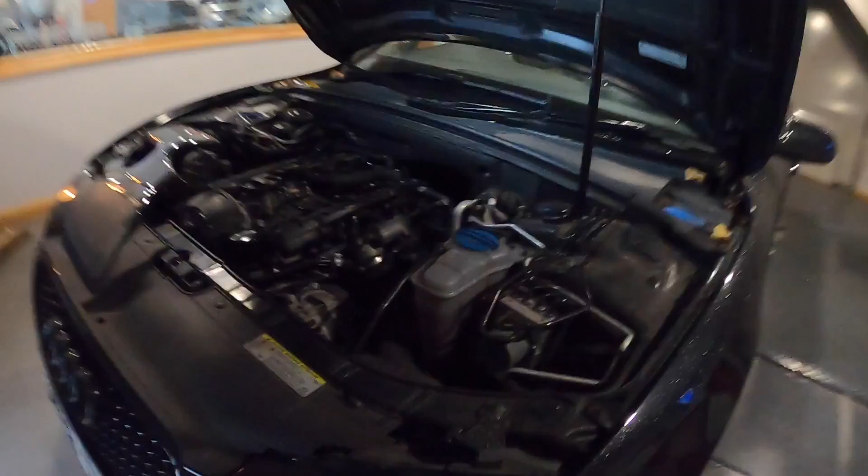Hello and welcome to the Audi A4 2-litre TFSI K04 converted. It's got the K04 down there. It's a bit dark in here today. I've been moved into the dyno room from the workshop. So let's get a bit of light on this.

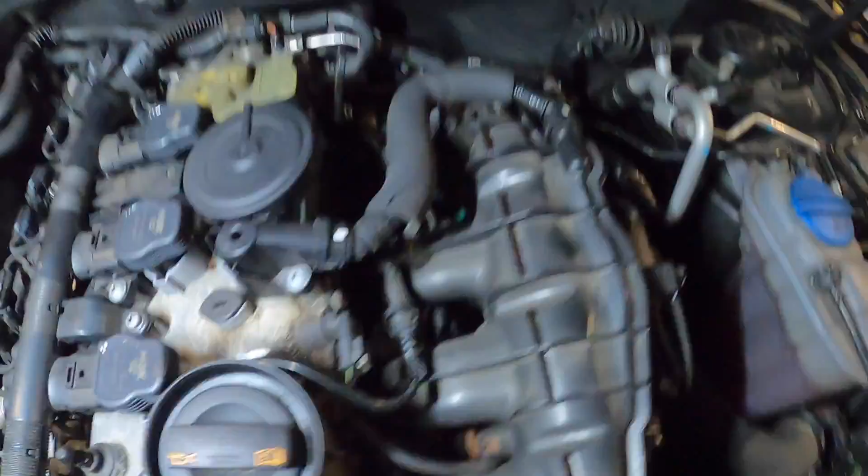So we've got a K04 turbo. Unfortunately, he hasn't got the injectors, but we'll still set it up for him today to get as close as I can. It's obviously maxing out these injectors. So let's begin. So first of all, smoke test.

Took the intake pipe off, so then look at that first. Get the smoke machine out. A bit harder in here, I've got to go on the old compressor. And then we'll see what this is saying. So that's the smoke machine all attached on the power. Minus is there. I was just waiting to see what this says.

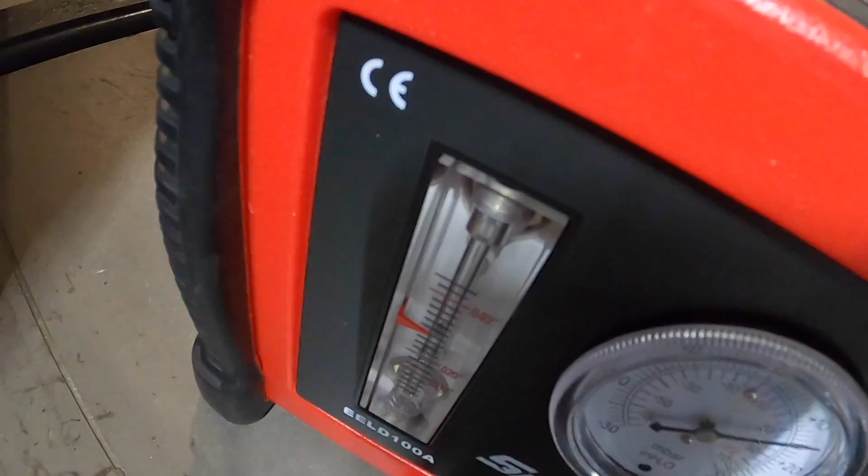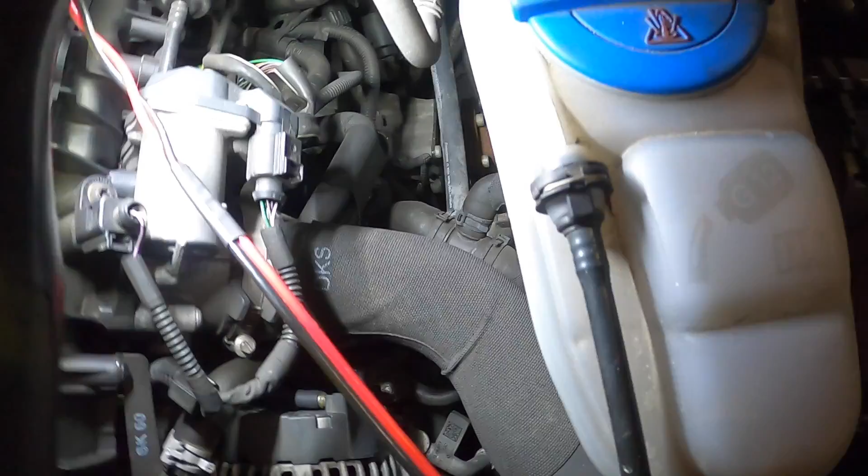Usual places, normally the PCV pipes. You get the rocker bolt sometimes. This one's got a metal rocker, so it's different. So far so good. It's balancing on there. Just looking at the little ball bouncing away. That normally means there's no leaks. There's no bad leaks anyway. That's pretty good. It's obviously decat. His sensor's actually here. It's the oxygen sensor. Happy days.

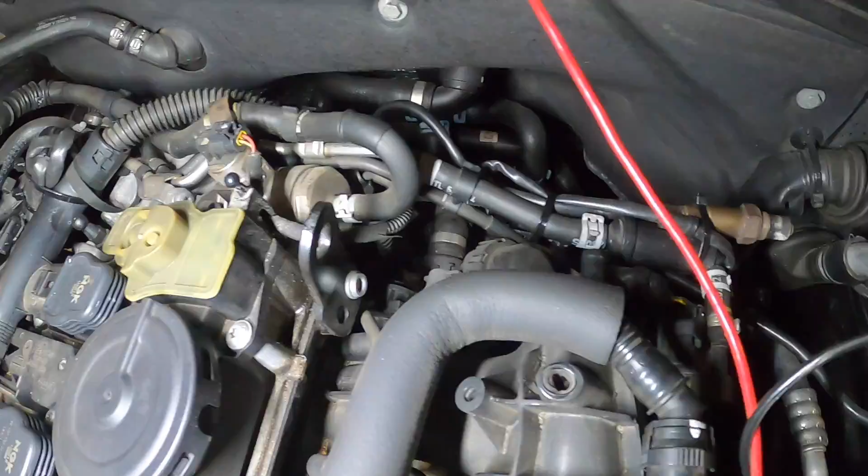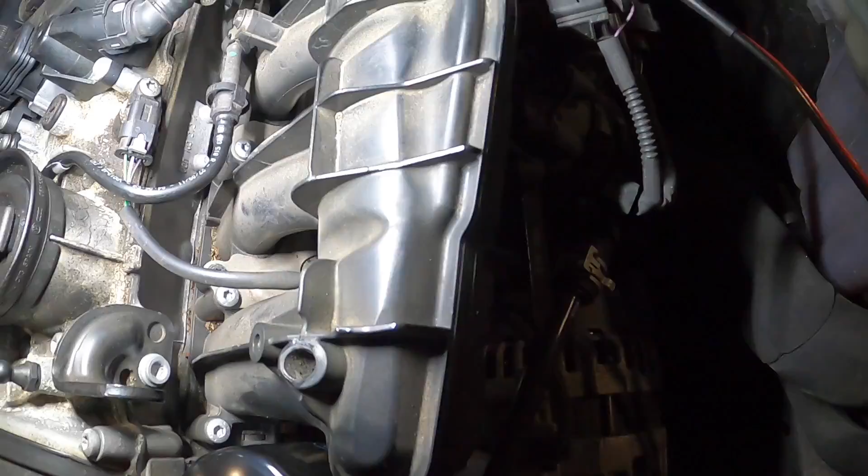Basic setup, K04 turbo. It's got an APR intake. I'm gonna whip one of the plugs out, see what plugs he's got in it. Standard rail sensor, standard injectors, uprated high pressure fuel pump. It's got a decat downpipe, exhaust back. Pretty basic stuff. I'm just going to set it up today. I'm not looking for the figures because he hasn't got the injectors. But we can still get it all set up for him so he can drive it.

Gonna check to see if the N75 is plugged in. A bit awkward on these to come around the front. Yeah, that's all plugged in. It's just down there. Awesome. So I'm just going to whip one of the plugs out, see what the crack is with that, see what the gap's like, see if I have to remove the other three. And then we'll begin tuning, see what's going on with it. So let's do that.

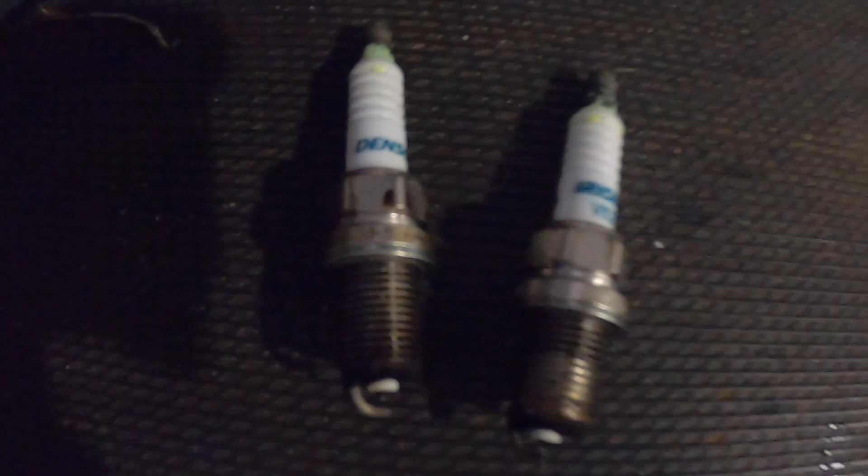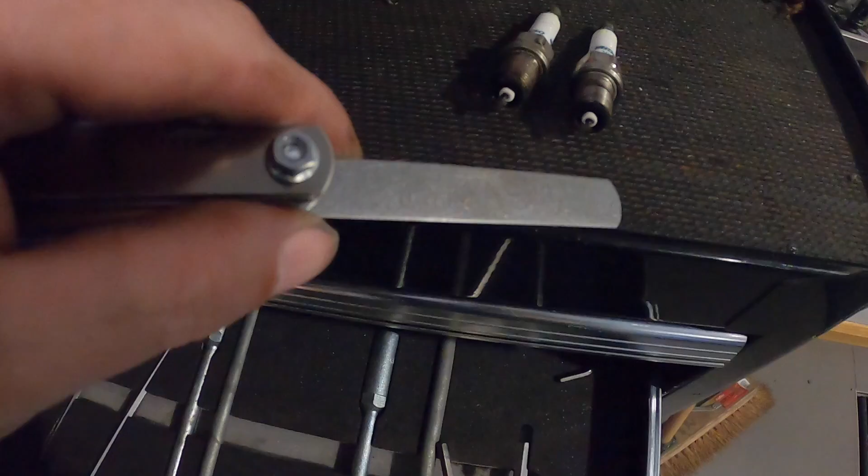Right, running a Denso plug. Looks like a VK22. Can't quite see the heat range on these, so I'm going to have to Google it a little bit. These rocker gaskets started to go around the top, it's getting a bit oily. I've gapped them to 0.7, so basically it's 0.7 mil. This is 0.028 in Imperial. So they are gapped, all four are now gapped and ready to go in. So just put them in and then carry on.

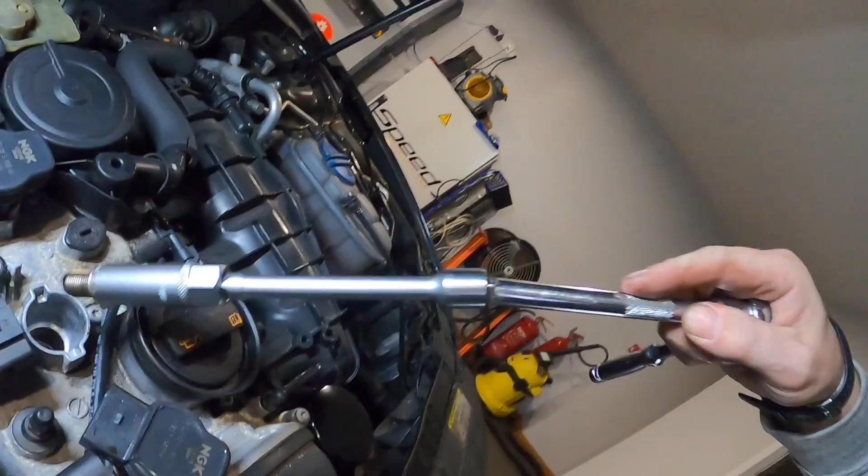A bit of a tech tip. With these spark plugs, once you've gapped them, never just drop them into the hole. Actually place them in with your spark plug socket, because once you've gapped it, if you drop that into the hole, you can end up tapping the electrode and then changing the gap on the plugs, so it's not ideal. Alright, here we go.

So we're in the car, checks all done. Just gonna get set up in the car. First of all, extension lead, because OBDs are a pain to find sometimes, so I always run the extension. It's got a fancy wing mirror, but we'll deal with that. So first of all, VAGCOM. This is the first point of call. Make sure the car's okay. I've got an engine management light, so got to look into that, sort that out.

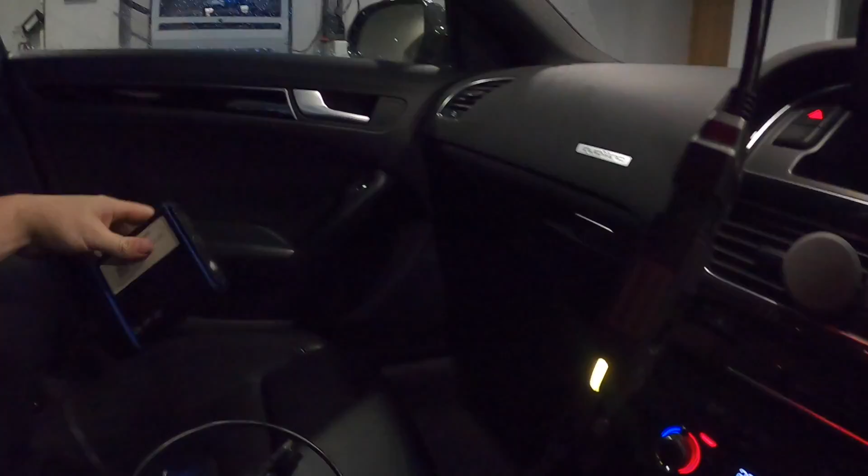Right, mess here. Going to use B flash on this hopefully, if they've got the stock file. So obviously these are virtual reads, so you can only do it if they have the stock file, otherwise I have to go find it and send it to them and then get them to put it on. So get that on there.

So I'm going to open up the laptop and get started on this one. See if we can make some juice. Right, so we're all on and all in and ready to go. So first of all, let's see what VAGCOM's saying. So I've got fault codes, I need to find out what they are.

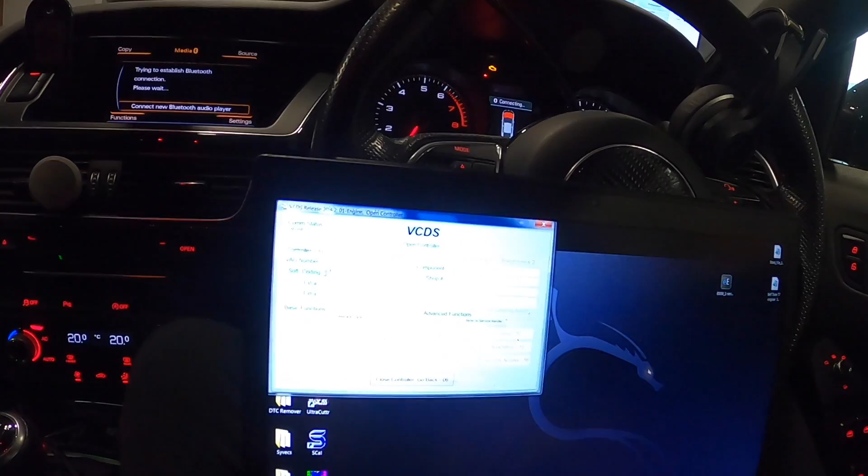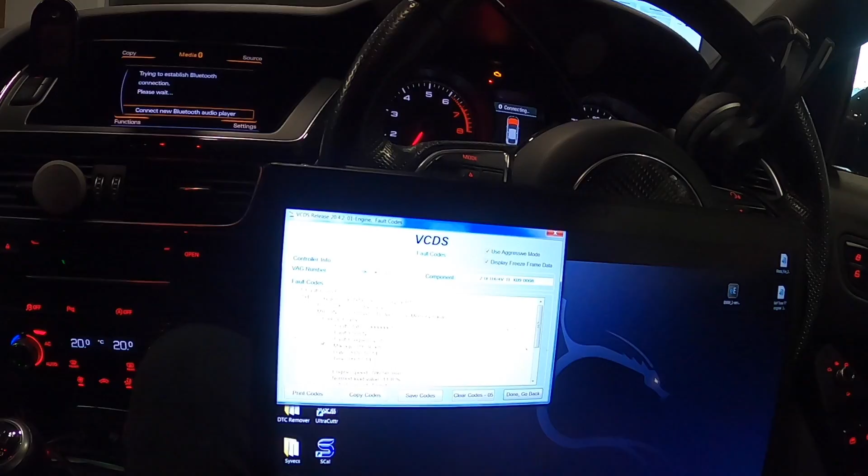There's no point starting tuning until you've fixed all the other stuff. So you've got bank one lambdas, oh, so we've only got decat, so that's fine. So that's an easy one. So it's not even a limp mode, shouldn't be. It's too lean, but he has left it kind of outside of the car, so that will be saying it's too lean, not the ideal way of dealing with it.

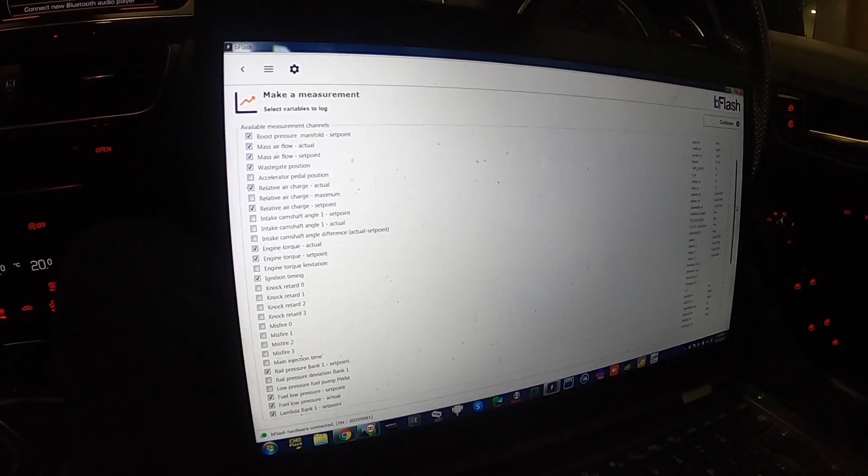Right, this one being a MED17 car, I'm actually going to use bFlash to log this one. So as I said, I don't know which way I'm going to do the videos, but I went through what the tools are and what they're doing, things like that. So bFlash will read and log this vehicle. So I'm going to use it for logging because it's a lot easier to use. You've got a lot more available on that.

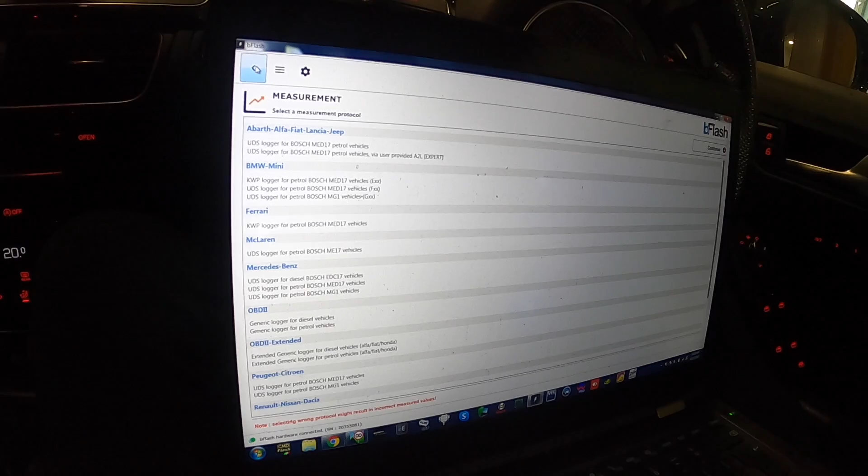So as a base run, well, actually first I'm just going to go in, read the car. Now I know it's a bFlash. I'm going to read the car and then I'm going to cap the boost. There's no sensors to set up on this one because it's literally just a K04 turbo with a few bits on. So I'm not looking for maximum power, but I do need to cap the boost first just to give it a run to see how that goes. So let's get this read off.

Right, well, this is going to be a fun day. So this particular car or ECU type, I haven't done the K04 conversion development for, so kind of thrown in the deep end. I've got a car on the dyno with a K04 on, but it's got no fuel changes, so it shouldn't be too hard just to set the boost up so it's somewhere near, obviously without the injectors.

So that's just flashing on the base tune now. I've literally just changed the fuel in, took the request to how I'd like it. I've left all the load tables stock just so I can see what the boost does as is, and that's pretty much it for the first run. I've also deleted the cat, so I can run it without it dropping into limp mode for whatever reason. I guess it's been over boosting, but I don't know.

So I'm just going to go through that. I'm going to run it up as it is and run bFlash for the logs, go over the logs and start bringing the boost in and see how I get on with that, really. So, fun day. Luckily this is the only car in today, apart from the ones I've already got here. So I've got time to have a mess around and see what the crack is with this. So I'll come back to you when it's flashed, because I don't know how long it's going to take to flash being CMD. So hopefully it's not too long between flashes.

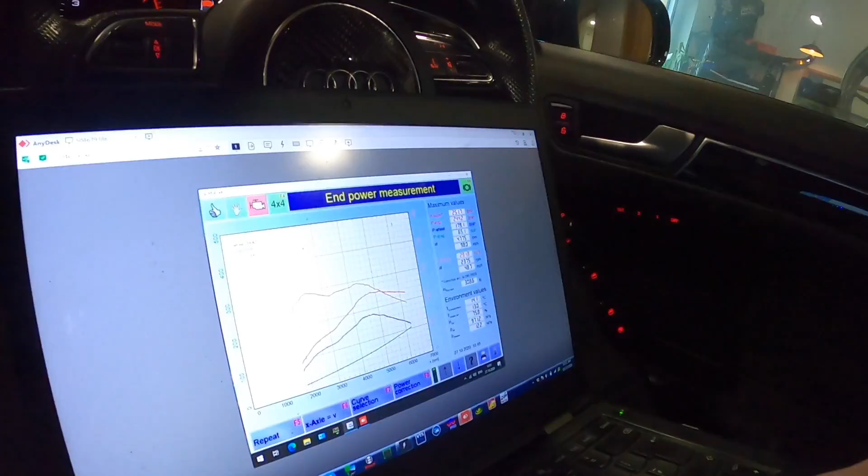Right, so run one, not so bad really. So running 251 brake at 291 foot-pound. Get that in the shot - 251, 291 foot-pound. Graph's not amazing, but I didn't really expect it to be on the first run.

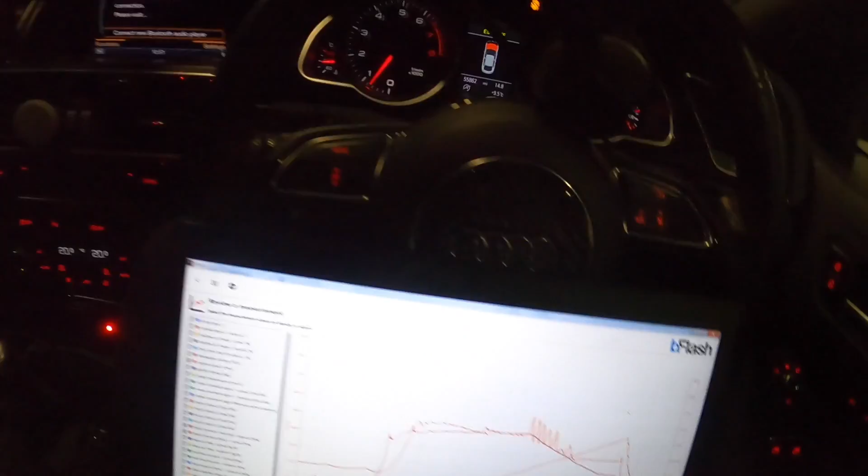So log wise, this is my boost request. I'm obviously going to have to request a fair bit of boost up top because this is a K04 Turbo. It can pull a lot more than the K03, so the top end's going to be very different. So I'm going to change that. Fuel and everything else looks okay.

So apart from that, I'm going to go in and change a few tables and see if I can get this boost to hold much better. I want to set this around about 300 horse, just to get it set up a little bit better. But as I've said, this is a bit of an R&D session because I haven't actually done these ones with a K04 Turbo, but I have tuned the K04 Turbo quite a lot, so I ain't too fussed, to be honest. As long as I can control the boost, I'm good to go.

So I will come back to you in a couple of seconds. I'm going to do some changes and then I'll come back to it and run it again.

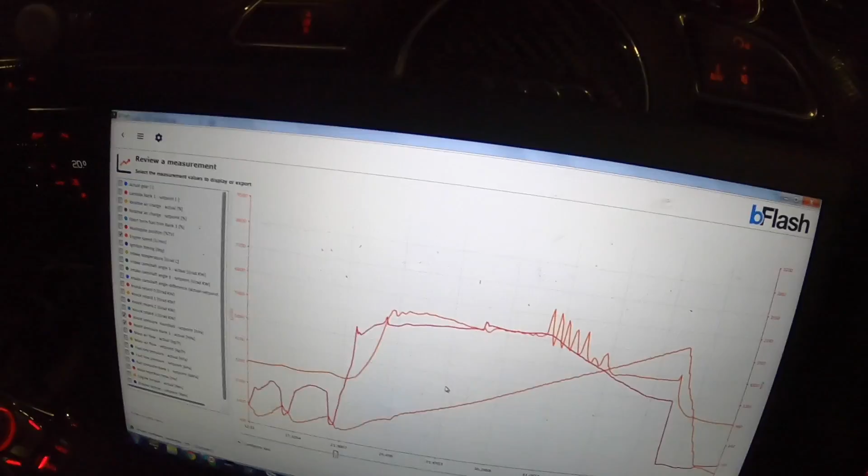Alright then, run 2. So I've added a little bit more load, a little bit more torque because these are torque-based ECUs being MED17, so I have to request more torque as well as add more load to make sure the boost matches. So let's see if I can shake this graph up a little bit and get it a little bit smoother, a little bit faster, a little bit more where I want it. So I'm just going to load up the old graph, doing another run. So run 2 is coming up, 2 seconds.

So we're not doing too badly. So now running 333 brake and 332 foot-pound at 1.2 bar. Just over, looks like. Yeah, 1.3 bar just clipping, but nice and smooth.

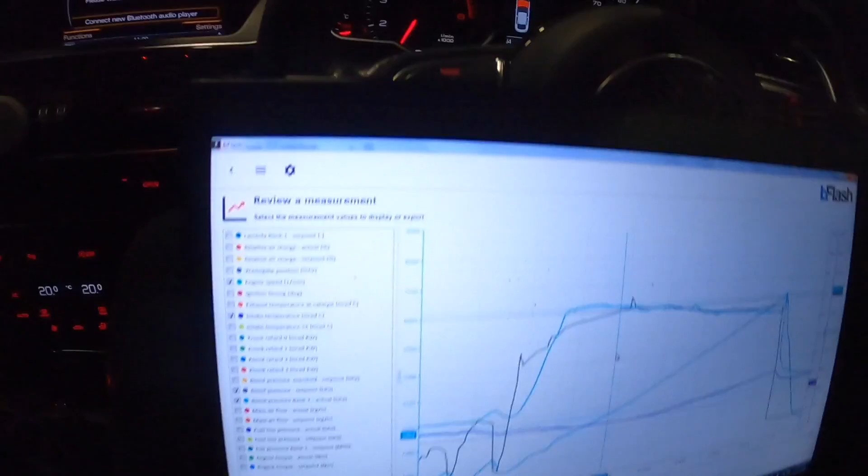And now you can see the boost is a lot better just by those few little changes, just to see where we can go. So I'm up to 27 intake temps, which is good, as it's 12 degrees outside, so only a 15-degree change. Wastegate should be still pretty low. Yeah, still got loads of gate left.

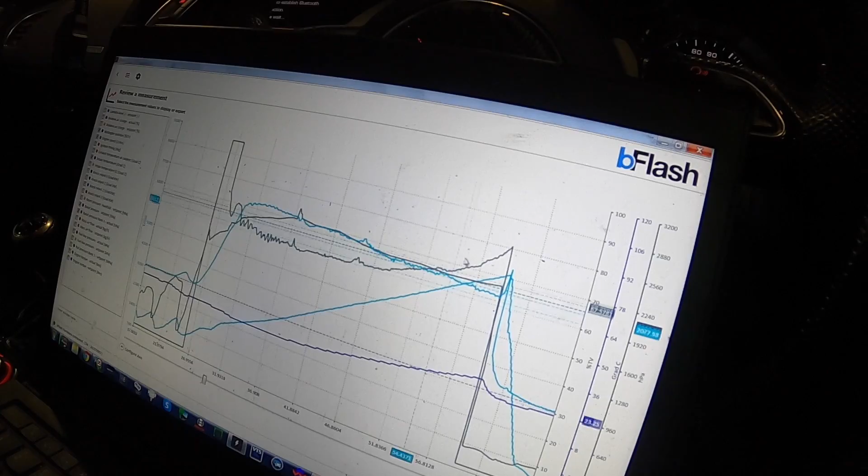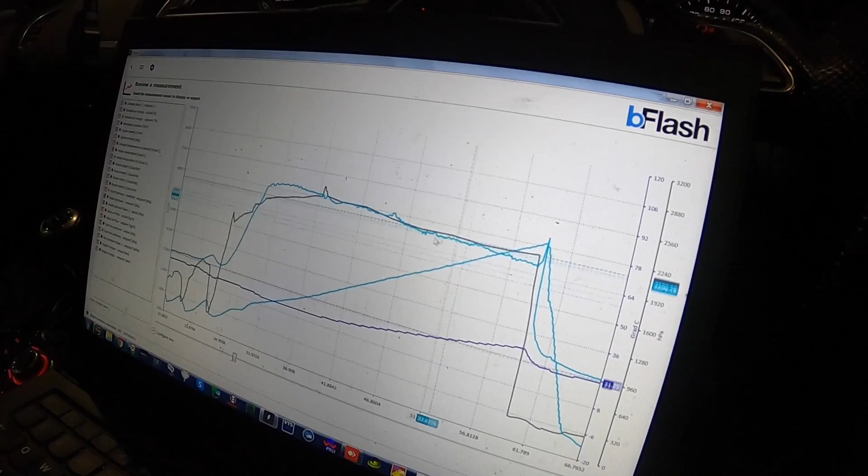That's fine. So boost wise, this light blue line is the actual, and the dark grey/bluey line is the request, and that's pretty much bang on. So I'm quite happy with it so far. I think it's pretty much as good as I'm gonna get. I haven't ramped it in too much, I've held it out more than ramping it in.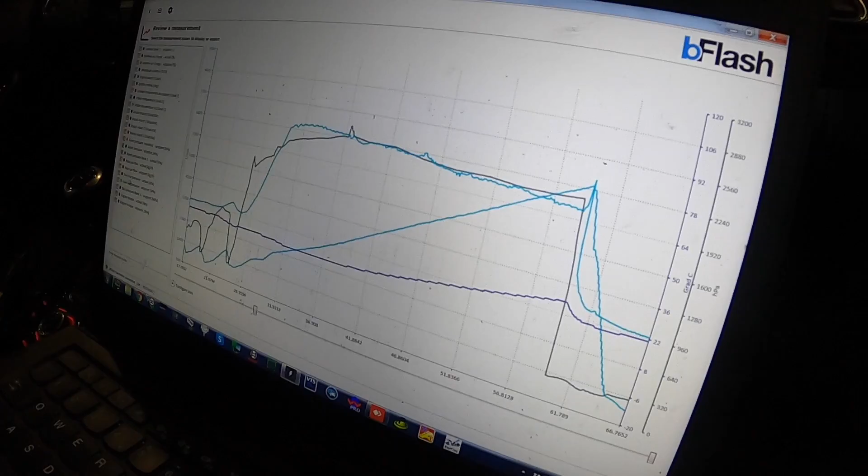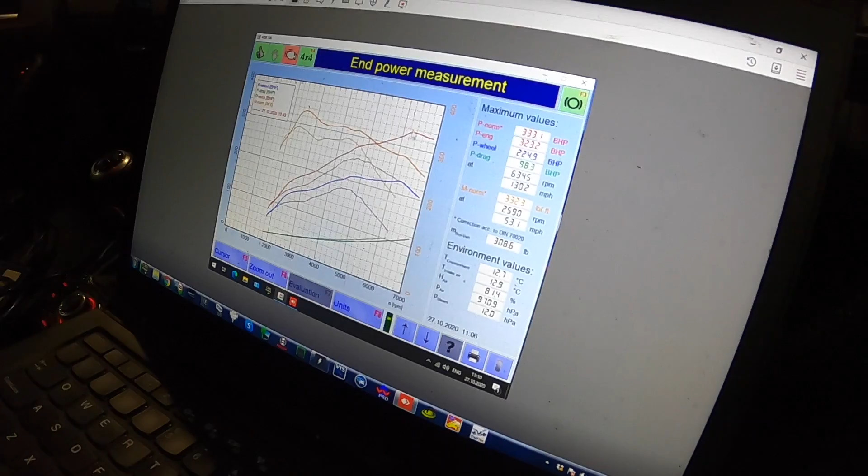See, these Audis always give quite weird graphs. Let's have a look. So as you can see, this red line here is the old one and this other red line's the new one, so I've given it a good chunk of power up top and torque through the whole rev range. Graph's never very nice in these Med 17 cars for some reason. But that is where I currently am.

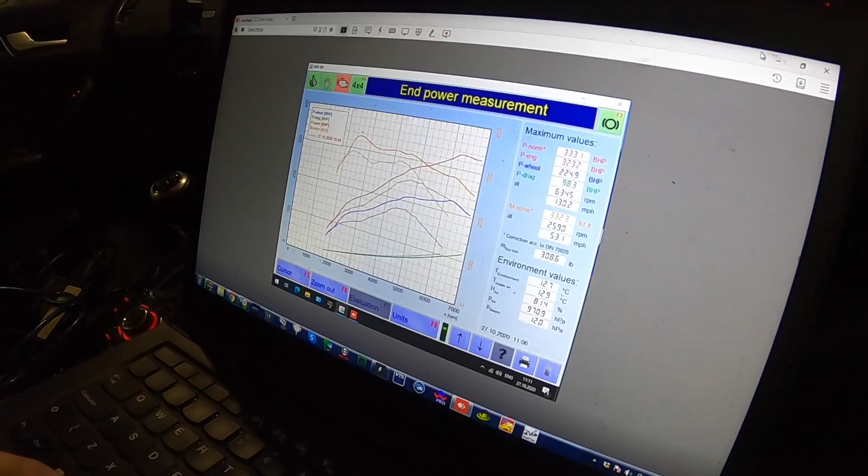So for a car that I haven't actually done a K04 conversion on yet, I'm not doing too bad. Exhaust temp's pretty good still, 834. We're okay everywhere else. I'm quite happy with that.

All I'm going to do is trim up this low area where it comes in, so everywhere between 2000 RPM and 3000 RPM. I'm going to give it a little bit more just to let it come in as it wants. No limp mode there, but it's just holding nice, boost's nice, so I'm quite happy with that.

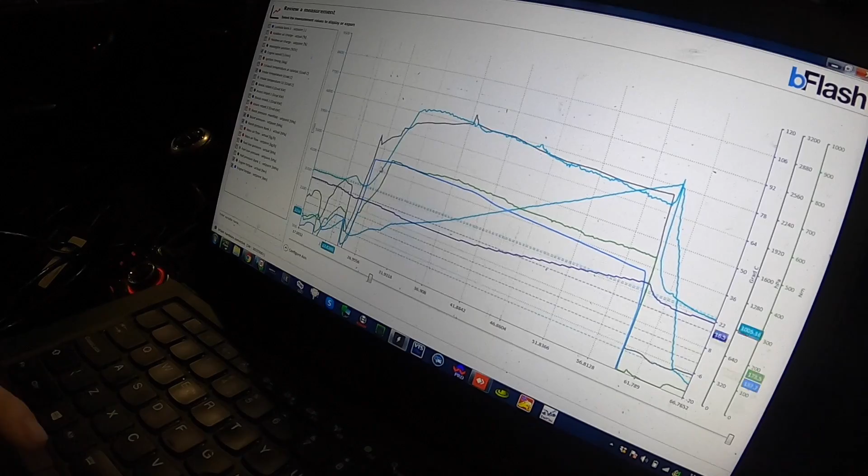I've only got, so engine torque as well, sorry, I bumped the engine torque up to a good 450 flat. The actual's running just below it anyway with the boost I've given it, so that's good to go.

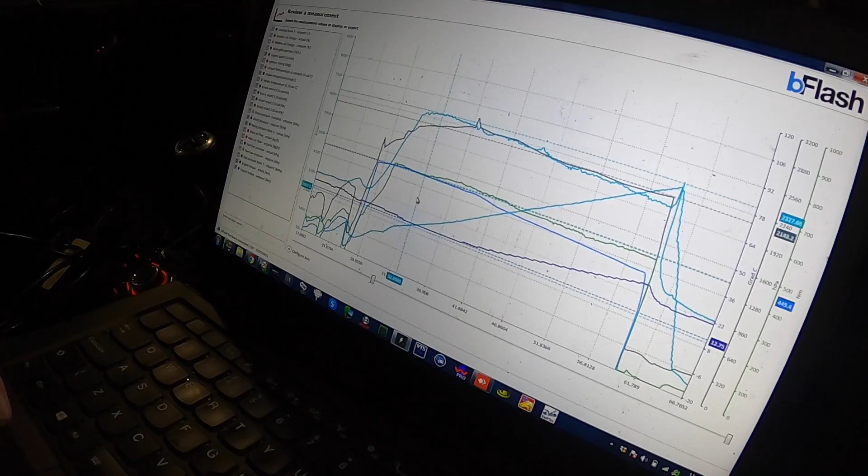So again, that just hits the peak as I want it to, so I'm at 450 Newton meters request, you can see there, and we're running a good 450 anyway. So it actually goes over at the top, so I could raise that up a little bit, but at the minute I'm good to go.

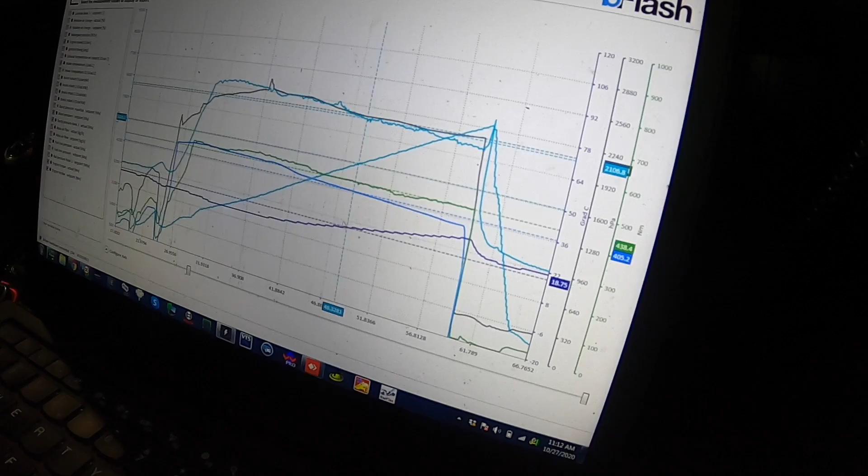I'm happy with that. Nice, good tune so far.

Let's have a word with the guys about booking cars in that I haven't actually done yet. Apart from that, it's alright. I know enough about these to figure it out, so I'm not too fussed. I'm only on the second run and I'm already at 333 horse.

Stock injector, so I'll probably stay there anyway. I'm just going to add pops and bangs for the masses, and then take it for a test drive because I'm going to need to make sure this drives alright. I've got no fault code for the Lambda, deleted that.

So for a start up tune, I'm happy with that. She's made a fair whack of power. She'll be a lot faster than she was. So I'm going to fix it up a little bit and do another run and come back to you.

I'll be back. Me being me, I've gone a little bit more just to see if I can make more, well, I've gone over all the fuel trims and everything else. I've still got fuel, so can't see any reason why I can't go a little bit more just to see what I can make. So I'll bump the boost up a little bit more, bump up the torque request just to see where my limits are really, because it's a bit of a development thing, so I might as well see what the crack is and what I can do.

Just going to go do another run of that. Currently at 336, I did another run in between. Bumped off the speed limit because this car flags up overspeed on the dash, so I got rid of that as well. So I'm just going to save this. So this is currently where we are. Put run 3. Right, so repeat.

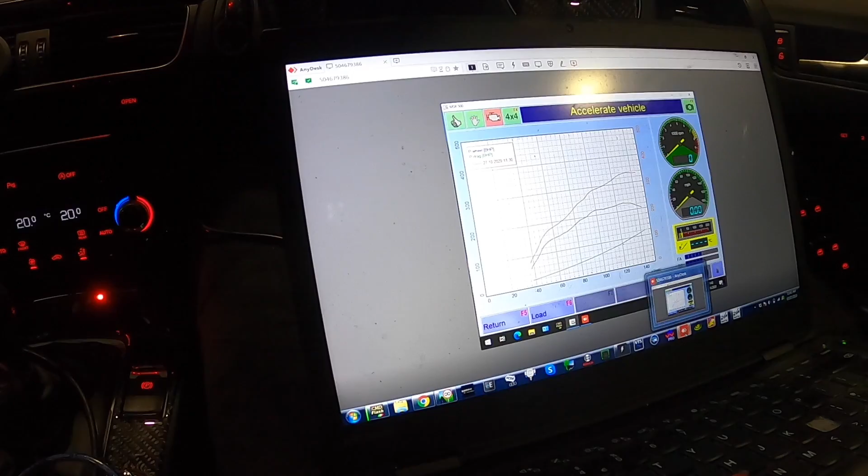Road, fastest run is that one. Let's move that a little bit. Right, so let's go again. Continue.

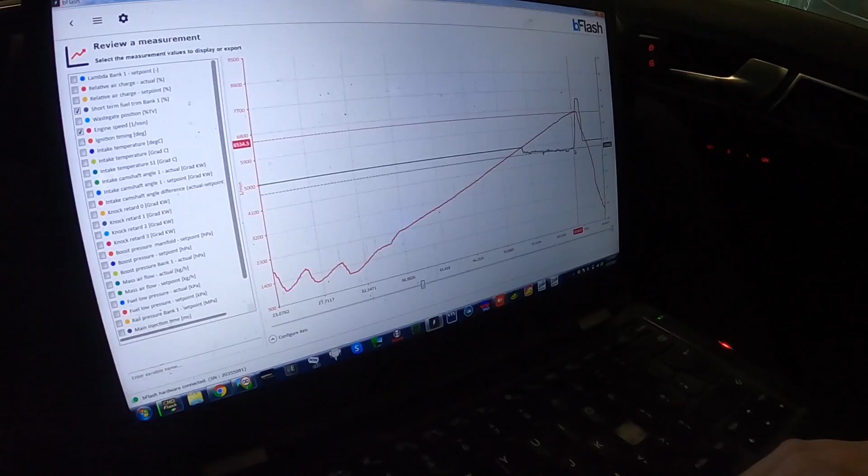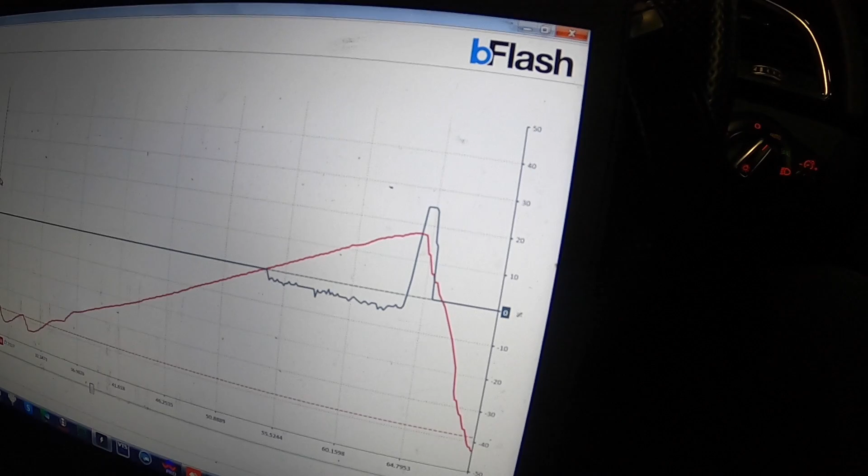So I have found the limit, and it's right here at 6,500 RPM. I can come around here. I ran out of fuel. So it's literally okay up until like 6,500 RPM. Boost wise, I was just at 1.5 bar. Get that up. So yeah, just at 1.5 bar boost.

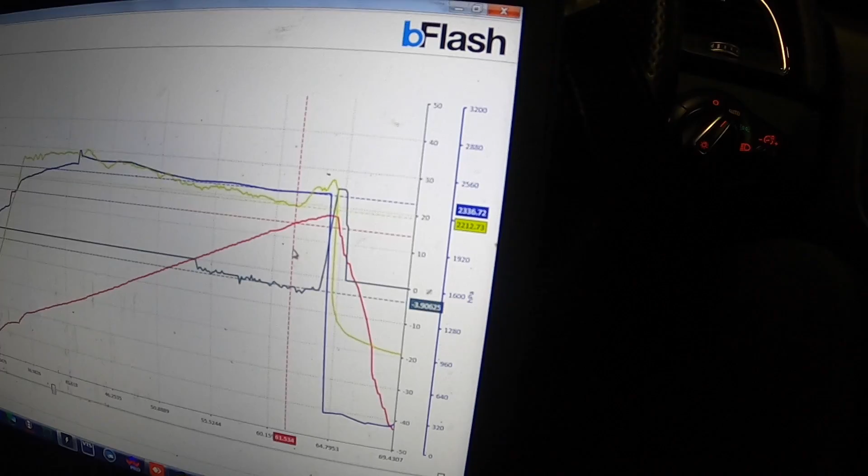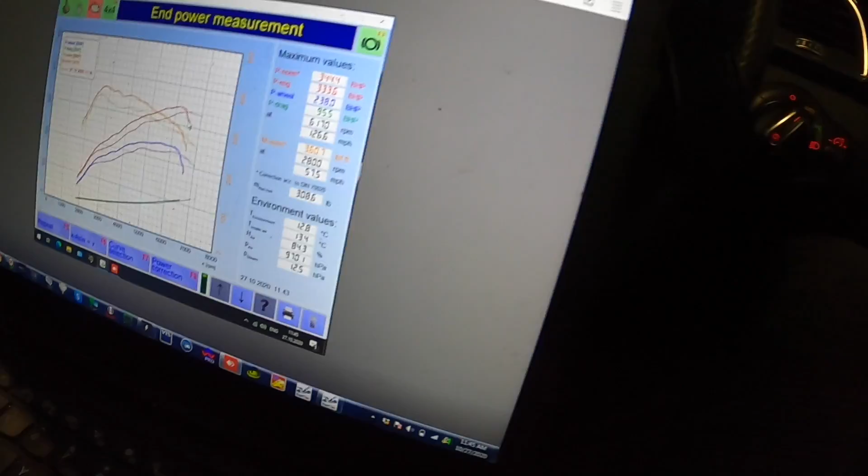And it just went lean here. So I'm at 344 brake, at 360 foot-pound, it's obviously making more of a K04 kind of graph as I expect. So unfortunately I can't leave it here, it's going to have to change the injectors. I'm going to have to come back to it at a later date, but that just goes to show that it can make more power. It's just that I've literally found my limit.

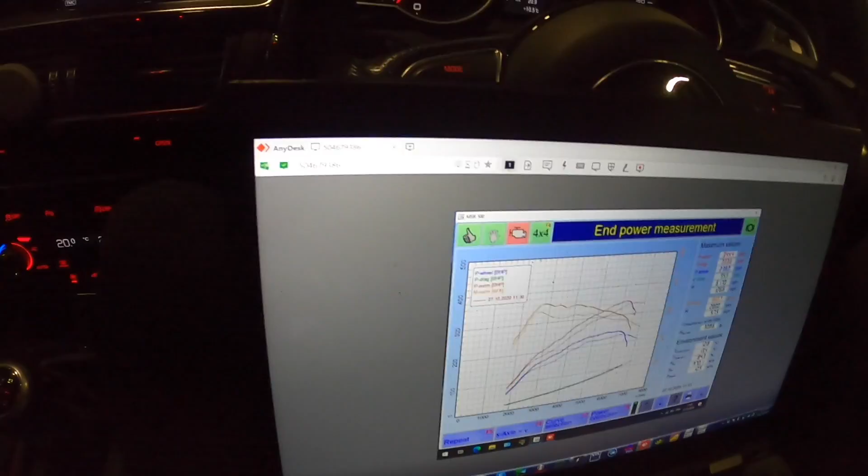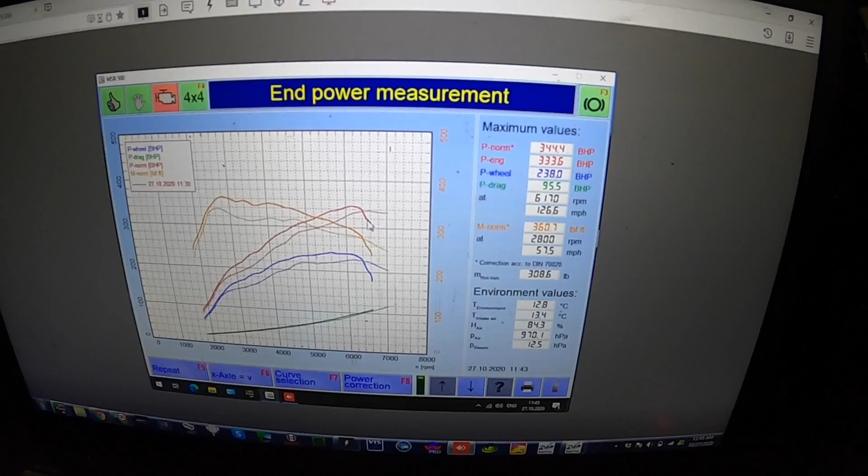So 344 brake on the stock K04 injectors is where I am with this. That'll obviously change depending on a lot of factors, how old the injectors are, quality of fuel, how good the pump is, etc. So at the minute that's where I can go, so I'm going to back it back. I'll probably go in between the two, maybe, or just knock it back to 330 brake and leave it there.

So that's the end of that session.